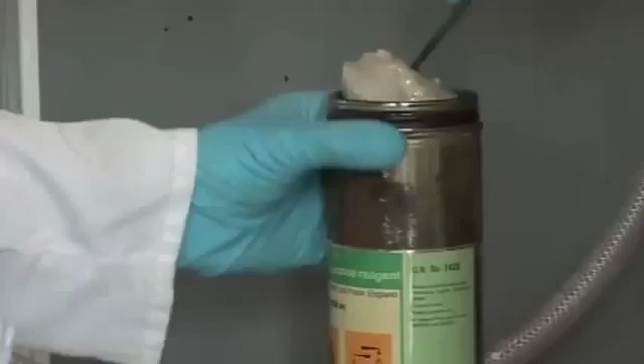It's stored under an oil to stop air or moisture getting on it. Reacts very, very quickly with air and also with water. Well, the hydroxide is a white crust on the outside. It's fizzing around as it's generating lots and lots of hydrogen gas. And see now the heat from the reaction is burning away all of that hydrogen.

You don't want to build a reactor out of stuff that wants to burn, react, anything. You want to go, whatever I've made you out of, I want it to be like the rock bottom of stability. I don't want there to be a step further down that is chemically favorable, because that's how things burn.

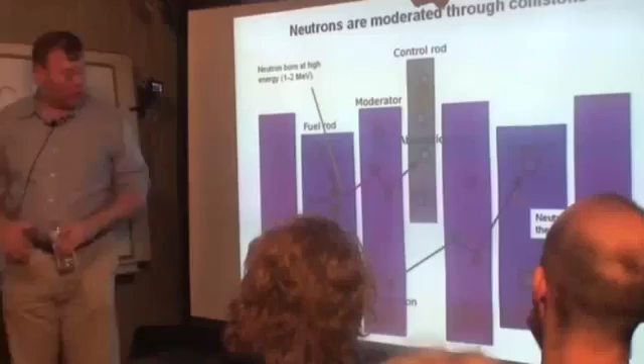The fast breeder guys use sodium because it doesn't slow down the neutrons. And everybody who was pushing plutonium said, we want a fast reactor. That's the only way to do it. The notion of the public being intimately involved in very complicated technical issues which went way beyond the competence of any member of the public, it just didn't seem that that was the right way to do it.

And I think the basic question is, can modern intrusive technology and liberal democracy coexist? The decision of what is acceptable is not something that we technologists can make. It's something that the public makes. I think a lot of people were daunted by nuclear energy. Oh, there's no way we could learn this stuff. I don't want to do that class. It's going to be too hard.

These three coolants are generally associated with three different nuclear fuels. Liquid sodium-cooled reactors are fueled by plutonium. Water-cooled reactors are fueled by enriched uranium. And molten salt reactors can be fueled by thorium. The reactors deployed commercially around the world are water-cooled. Today, we use water to cool reactors because we use enriched uranium as fuel. And we use enriched uranium as fuel in today's reactors because they are water-cooled.

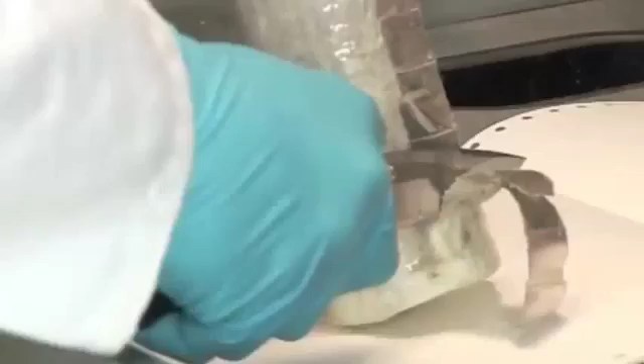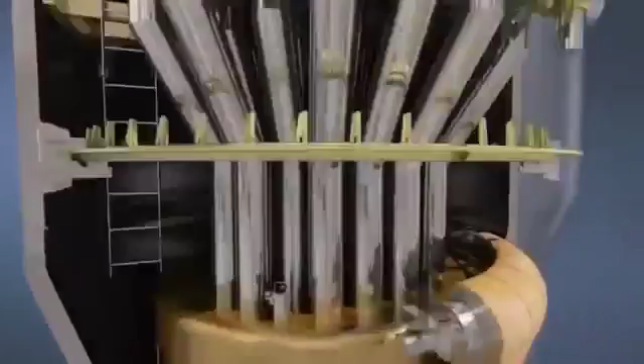Despite sodium's reactivity with both air and water, it is in some respects a safer coolant than water. This is because our enriched uranium-fueled water-cooled reactors pressurize the water to raise its boiling point and drive steam turbines more efficiently. If we didn't pressurize the water, then we'd be using much more uranium and producing much more nuclear waste per watt of energy.

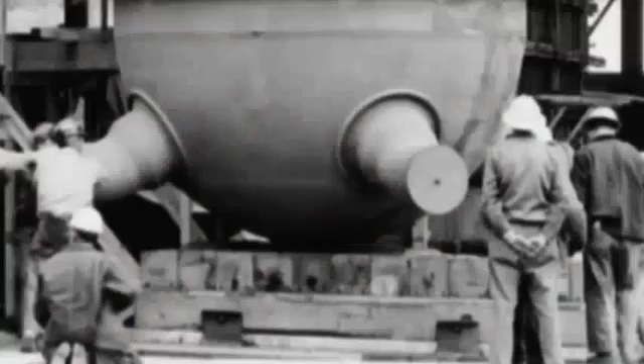In addition to being a thorium guru, Weinberg was also the original inventor of the pressurized water reactor. So it was a little bit of a tricky thing to have the inventor of the light water reactor advocating for something very, very, very different. As long as the reactor was as small as the submarine intermediate reactor, which was only 60 megawatts, then containment shell was absolute. It was safe. But when you went to 1,000 megawatt reactors, you could not guarantee this.

Weinberg never really was crazy about the light water reactor. He didn't like the fact that it had to run at really high pressure. He figured there would be an accident someday where you were not able to maintain the pressure or keep cooling it. In some very remote situation, conceive of the containment being breached by this molten mass.

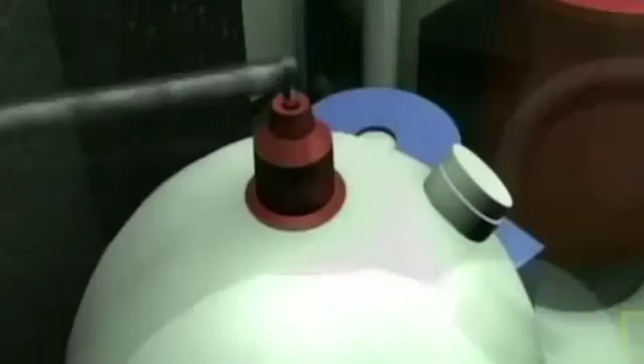A small valve in this collection of pipes is stuck in an open position, letting steam and water escape from the reactor core. It's critical that the uranium fuel rods that make up the reactor core stay underwater. A yellow tag covers an important light. They're convinced that the core is covered by water. A huge bubble of hydrogen is forming right inside the reactor vessel.

The hydrogen was generated by reaction between steam and the zirconium fuel cladding. And then that hydrogen ignited from some sparks. Boom! The whole building shudders. I mean, the whole building, the plant building, boom! And somebody says, what was that? An explosion had taken place inside the containment building. And those gaseous fission products came out and were released to the environment.

Pregnant women and preschool-aged children leave the area within a 5-mile radius. It took a month to shut the reactor down. But finally, Unit 2 was stone cold dead. The biggest environmental release at Three Mile Island was krypton and xenon, but they don't have an uptake in the body. It scared a bunch of people, but it didn't hurt anybody.

It really comes down to which fission product is it. I know that sounds particular. Number one, most dangerous is iodine, because of the way it's taken up by the thyroid.

There was a metallic taste in our mouth, an acidity. They say radiation has no taste. It was only later we realized it was the taste of radioactive iodine.

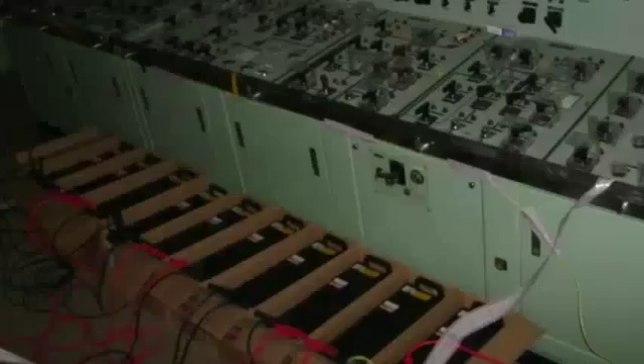The coastline was devastated. Most of the backup diesel generators needed to power the cooling systems were located in basements destroyed by the tsunami waters. The workers had no functioning instruments to reveal what was happening inside the reactor cores. All of us who had a car were asked to get the batteries. The scavenged batteries allowed vital monitoring instruments to work again.

The levels caused panic. Pressure was going up and up. Everyone thought, isn't this dangerous? The rising heat of the fuel rods in the reactor core was creating massive amounts of radioactive steam and hydrogen.

We begin by making these uranium oxide pellets, and we form them into fuel rods clad in this zirconium. Turns out the zirconium, in certain conditions, can be quite reactive with the water that's surrounding the reactor. We have a fuel and a coolant that are inherently incompatible with one another, and that's how we run nuclear today.

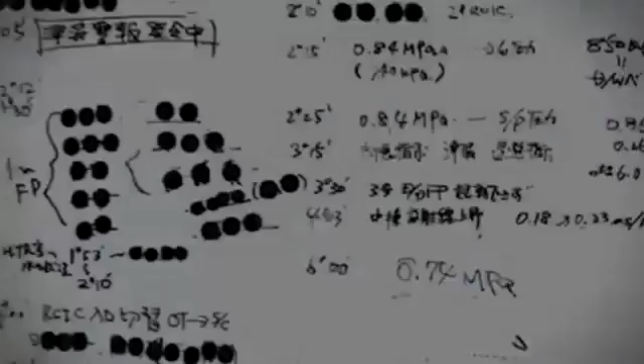As night fell, the Japanese government ordered an evacuation of everyone within 2 miles of Fukushima Daiichi. Radiation levels were now rising. And this isn't inside the reactor itself, it's in the office. The engineers suspected something TEPCO would not acknowledge for months. Nuclear meltdown had begun. The Prime Minister began to suspect that TEPCO was hiding the truth. He decided to go to Fukushima Daiichi himself.

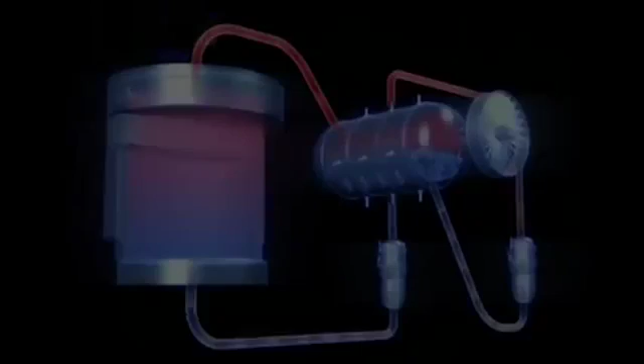Three Mile Island, Chernobyl, and Fukushima were all radically different incidents. What was similar at all three was how poorly water performed as a coolant when things started to go wrong. This is not to say that water coolant caused these accidents to occur. It did not. All three accidents were initiated by different combinations of design and operator error. It was water coolant which allowed these errors to multiply and ultimately result in the escape of radioactive isotopes into the environment.

At Three Mile Island, water couldn't be pumped into the core because some of the coolant water had vaporized into steam. The increased pressure forced coolant water back out, contributing to a partial meltdown. At Chernobyl, the insertion of poorly designed control rods caused core temperature to skyrocket. The boiling point of the pressurized water coolant was passed and it flashed to steam.

It was a steam explosion which tore the 2,000-ton lid off the reactor casing and shot it up through the roof of the building. At Fukushima, loss of power to the pumps allowed coolant water to get hotter and hotter until it boiled away. These three accidents illustrate the need for a coolant with a higher boiling point than water.

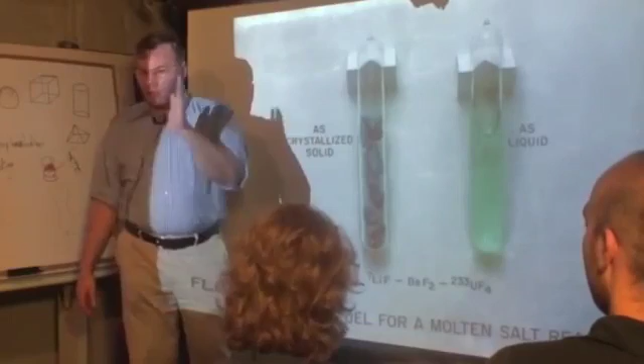It's only got 100 degrees of liquid range, okay? 0 to 100 C. That's not really particularly impressive. So to jack up water's liquid range, you have to put it under pressure, because that's the only way to get water to go up to 300 degrees C without turning into steam. Super high pressure is one of the basic challenges, difficulties, flaws, whatever you want to call it, of the water-cooled reactor approach. The salts, on the other hand, you have to heat them up to about 300 C before they melt. But once they melt, they have 1,000 degrees C of liquid range.

Safety is one of the most important reasons to consider very seriously molten salt reactors. And this is because of the clever implementation that was demonstrated in the molten salt reactor experiment of the freeze plug and the drain tank. And what this simply was, it was just a small port in the bottom of the reactor that was kept plugged by a frozen plug of salt. And to keep the port plugged, they had a blower that would blow cool gas over it. So there was a little plug of frozen salt there.

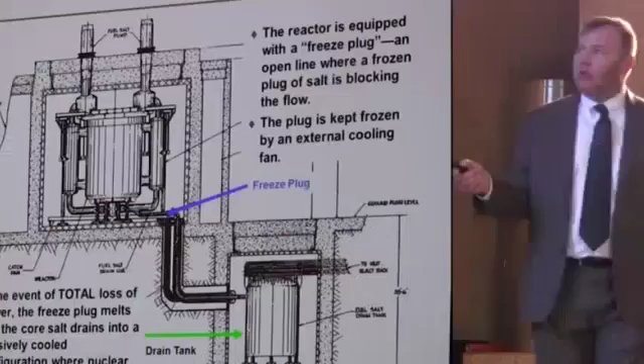Well, if the power went out, the blower turned off, and the heat would melt the frozen plug, and guess what? The fuel drained into this drain tank, and the difference between the drain tank and the reactor vessel was, the reactor vessel was not meant to lose any thermal energy. The only place you wanted to lose thermal energy was to give it up in the primary heat exchanger. The drain tank, on the other hand, is designed to maximize the rejection of thermal energy to the environment.

And I'm a mechanical engineer, so all we ever talked about in school was how to add heat to things and take heat out of things. And one of the hard things about designing a nuclear reactor is design it to not lose any heat while you're running it, because you don't want to lose a bunch of heat in normal operation, but then to turn around and try to keep it cool if something goes wrong. So there are two conflicting things. The great thing about liquid fluoride reactors is you can design them completely separately. You can say, here's my reactor and it's designed to make heat, and here's my drain tank and it's designed to cool in all situations.

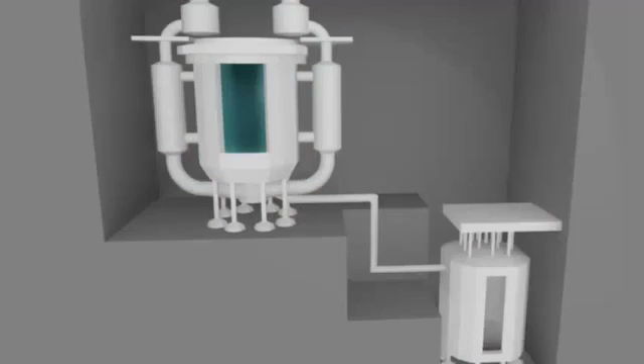Better than having what's called deterministic safety systems or engineered safety systems is to have inherent safety systems that will work 100% of the time because it is based on the laws of physics. A cooling system that is completely passive, that does not rely at all on electrical power to manage the decay heat after shutdown. And it's always going to work because gravity is always going to be turned on.

Because it was not operating at high pressure, this is a system that was tolerant of extraordinary damage. I mean, if you wanted to go in and jam a projectile through the side of the reactor, the salt would still just drain out into a pan, but the pan would run back into the drain tank. Now in that situation, you're not going to turn the thing right back on again, but it's not going to lead to a dangerous release of radioactivity.

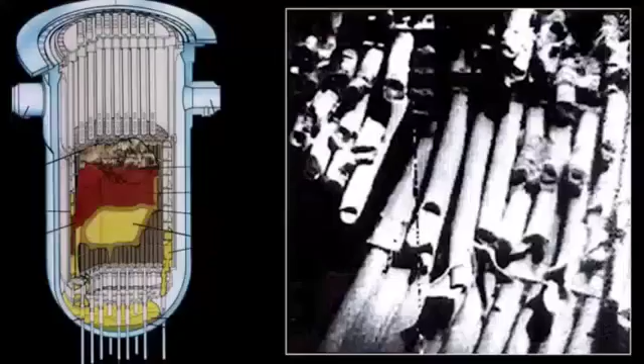At Three Mile Island, coolant water which had boiled into steam reacted with the fuel rod cladding to produce hydrogen gas. This led to several explosions. At Fukushima, steam also reacted with the fuel rod cladding to produce hydrogen gas. This led to hydrogen gas explosions at reactors 1, 3, and 4.

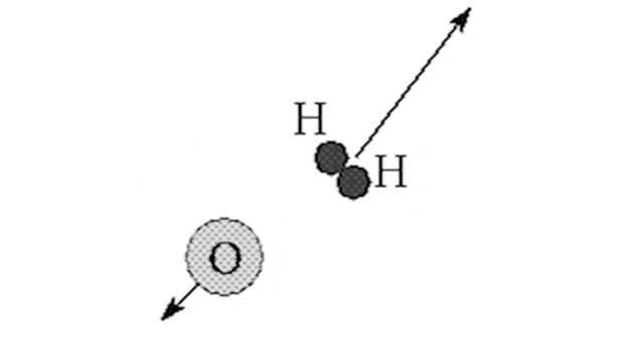Let me diss on water a few more times. It's a covalently bonded substance. The oxygen has a covalent bond with two hydrogens. Well, neither one of those bonds is strong enough to survive getting smacked around by a gamma or a neutron. And sure enough, they knock the hydrogens clean off. Now, in a water-cooled reactor, you have a system called a recombiner that will take the hydrogen gas and the oxygen gas that is always being created from the nuclear reaction and put them back together.

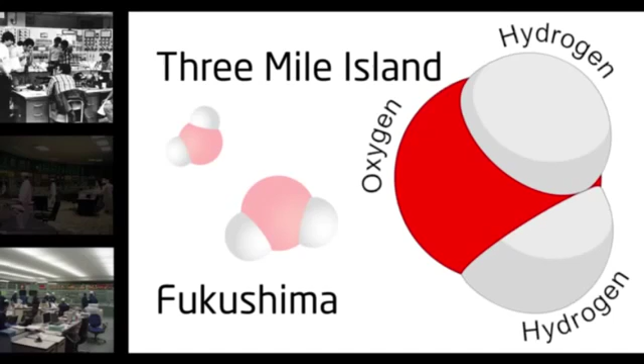It's a great system as long as it's operating and the system is pumping. Well, at Fukushima Daiichi, the problem was the pumping power stopped. H2O can also react with the fuel cladding to release hydrogen and damage the cladding, releasing radioactive isotopes. These two accidents illustrate the need for a coolant which is more chemically stable than H2O. A nuclear reactor is a rough place for normal matter.

The nice thing about a salt is it's formed from a positive ion and a negative ion. Like sodium's positively charged and chlorine's negatively charged. And they go, we're not really going to bond. We're just going to kind of associate one with another, you know. And that's what's called an ionic bond.

Yeah, you're kind of friends, you know. You're Facebook friends. Facebook friends.

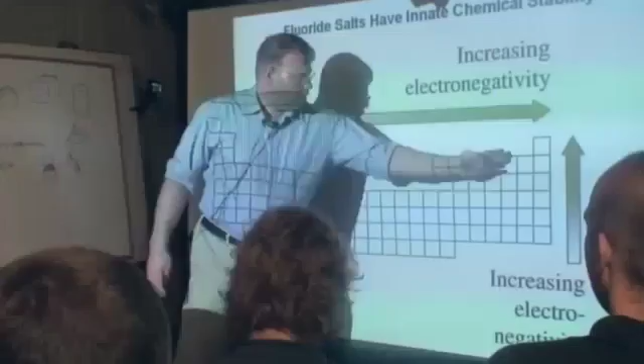All right, well, it turns out this is a really good thing for a reactor because a reactor is going to take those guys and just smack them all over the place with gammas and neutrons and everything. And the good news is they don't really care who they particularly are next to. As long as there's an equal number of positive ions and negative ions, the big picture is happy. A salt is composed of the stuff that's in this column, the halogens, and the stuff that's in these columns, the alkalis and the alkaline earths.

Fluorine is so reactive with everything, but once it's made a salt, a fluoride, then it's incredibly chemically stable and non-reactive. Sometimes people go, oh, you're working on liquid fluorine reactors. No, I am not working on liquid fluorine reactors. We're working on fluoride reactors, and there's a big difference between those two. One is going to explode, the other one is like super duper stable.

I see moving to molten salt fueled reactor technology as a way to get rid of all the stored energy term problems that we look at in today's reactors, whether it's pressure, whether it's chemical reactivity, even the potential of the fission products in the fuel itself to be released. In fluoride fuel, which is what we would use in a molten salt reactor, those fission products are bound up very tightly in salts. Strontium and cesium are both bound up in very, very stable fluoride salts. Cesium fluoride, very stable salt. Strontium difluoride, another very stable salt.

In light water reactors, cesium is volatile in the chemical state of the oxide fuel of a light water reactor. And that's been one of the concerns about cesium release. Cesium would not release from a fluoride reactor at all. So why are we using water to cool today's reactors? If water coolant prohibits us from completely consuming uranium or thorium as fuel, why did we start using it in the first place? The association between different nuclear fuels and their respective coolants is because some nuclear fuel requires slow neutrons and some nuclear fuel requires fast.

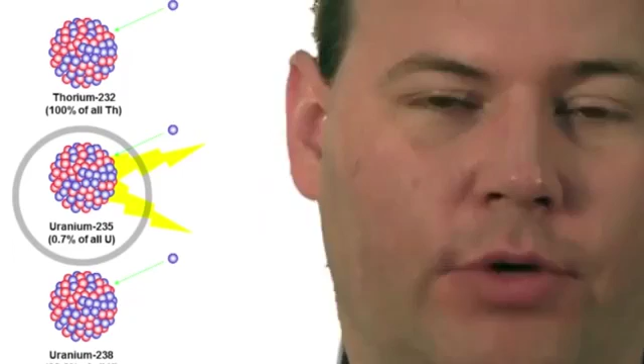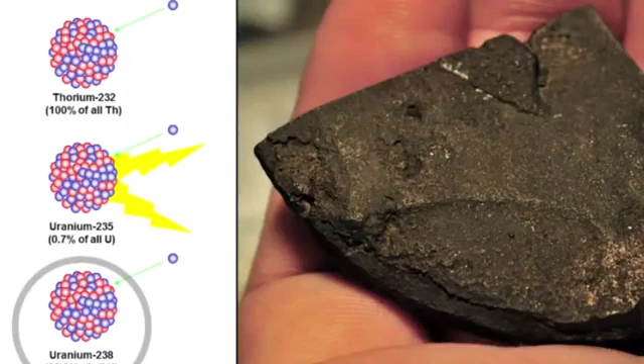There really were three options for nuclear energy at the dawn of the nuclear era. Only one of the materials in nature is naturally fissile, and that's uranium-235, which is a very small amount of natural uranium, about 0.7%. This was the form of uranium that could be utilized directly in a nuclear reactor. Most of the uranium was uranium-238. This had to be transformed into another nuclear fuel called plutonium before it could be used. And then there was thorium. And in a similar manner to uranium-238, it also had to be transformed into another nuclear fuel, uranium-233, before it could be used in a reactor.

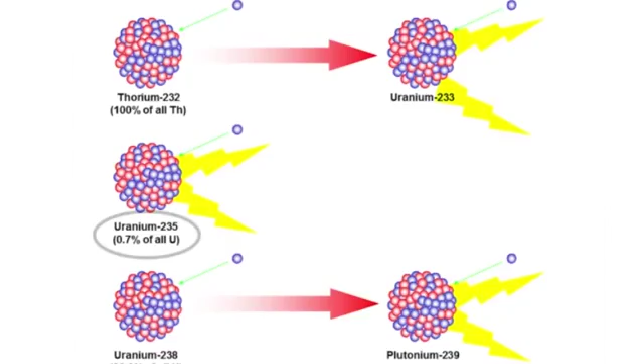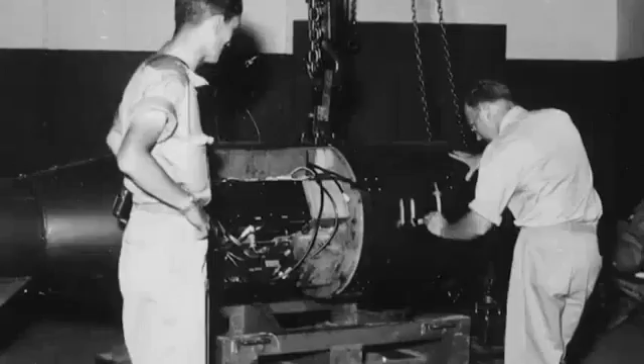Well, this was wartime. Their plan was to make bombs. They took natural uranium and they separated those two isotopes. They would highly enrich uranium-235 from less than 1% up to like 90+%. Took big factories. It's very difficult to do isotopic enrichment. But this is how they made the uranium for the first nuclear weapon used in war. This was the bomb at Hiroshima. It was called Little Boy.

Then they said, well, what can we do with all this junk uranium-238, the 99.3% of it? You could expose it to neutrons, and you could make it into plutonium. Now, plutonium is a different chemical element than uranium, so they can be chemically separated. Uranium-235 and uranium-238 are like identical chemically. There's no chemical difference between them. But there is a chemical difference between plutonium and uranium, so it was a lot easier to do a chemical separation of the plutonium you'd made, and that's how they made the Nagasaki bomb, which was called Fat Man.

Okay, well maybe we can do the same thing with thorium. Maybe we can expose it to neutrons and we can make it into uranium-233. Uranium will be chemically separable from thorium and we can go make a bomb out of it, right?

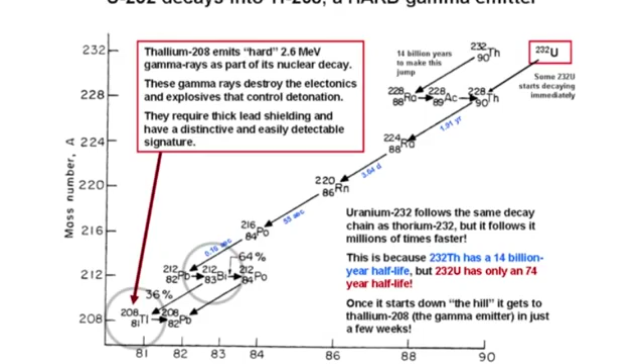Sounds great. It's a really bad idea because as you made the uranium-233, you were always making uranium-232. You didn't make a lot of it, you only made a little bit of it. But uranium-232 is much more radioactive than uranium-233. And in addition to that, here's the decay chain that uranium-232 is on. It jumps down to bismuth-212 and thallium-208. And these two decay products put out very, very strong gamma rays.

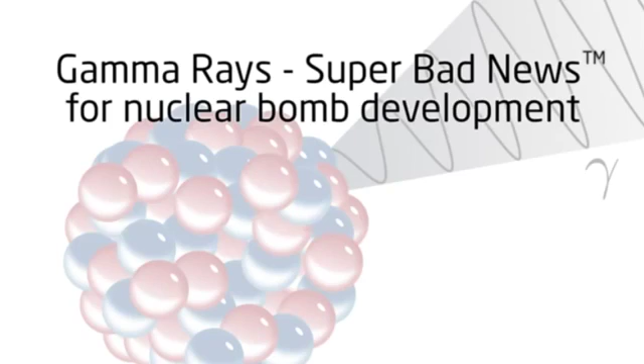And these gamma rays are just super bad news if you want to go and build a practical nuclear device, because they tell everybody where the stuff is and they kill you. So really quickly they were going, okay, we can work with uranium-235, that seems okay. We can work with plutonium, that seems okay. But this uranium-233 stuff, that's bad news for making a nuclear weapon. So thorium was just set aside.

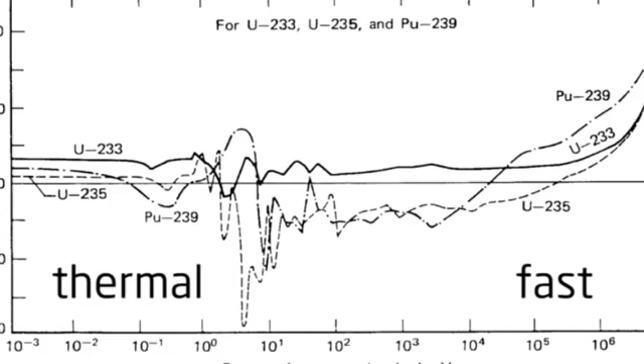How much energy did the neutron have that you smacked the nuclear fuel with? Okay, how much energy did it have? And then how many neutrons did you kick out when you smacked it through fission? 2 is a very significant number in breeder reactors. You need 2 neutrons. You've got to have 1 to keep your process going, and you have to have another 1 to convert fertile material into fissile material.

Okay, look at plutonium. It's that dip below 2 right there. That's what makes it so you cannot burn up uranium-238 in a thermal spectrum reactor, like a water-cooled reactor. You just can't do it. The physics are against you. And the reality is you do lose some neutrons. You can't build a perfect reactor that doesn't lose any neutrons. So they looked at this and they said, man, we just can't burn uranium-238 in a thermal reactor. It just can't be done.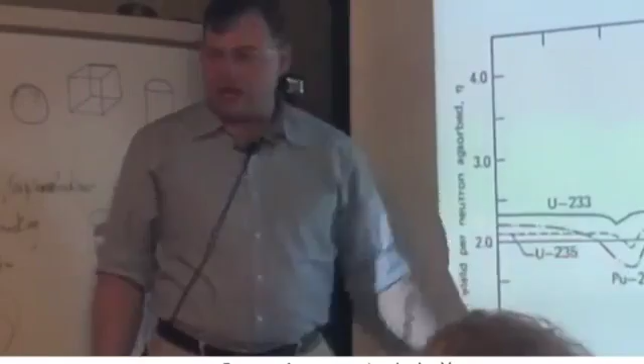Well, you know, these guys are undeterred. They said, well, here's what we'll do. We'll just build a fast reactor, because look how good it gets in the fast region. Wow, it gets above 2. In fact, it's up to 3. Wow, this is really good. Well, there's a powerful disincentive to doing it this way, and it has to do with what are called cross-sections. These are a way of describing how likely it is that a nuclear reaction will proceed.

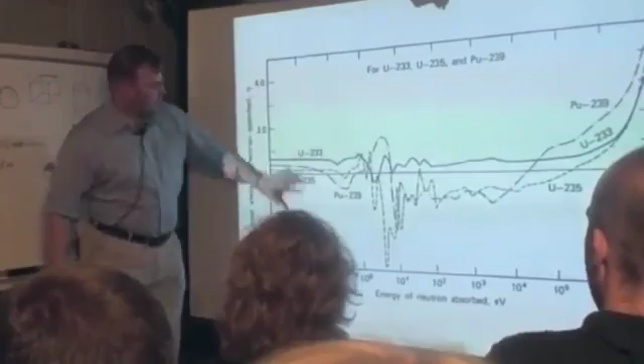Look how much bigger the cross-sections are in thermal than they are in fast. How many of these little dots are we going to need to add up to this size? We're going to need a lot. So this is why it was a big deal to be able to have performance in this region of the curve. Those little bitty dots, they're up here in this part of the curve. Okay, this is the fast region. This is the thermal region.

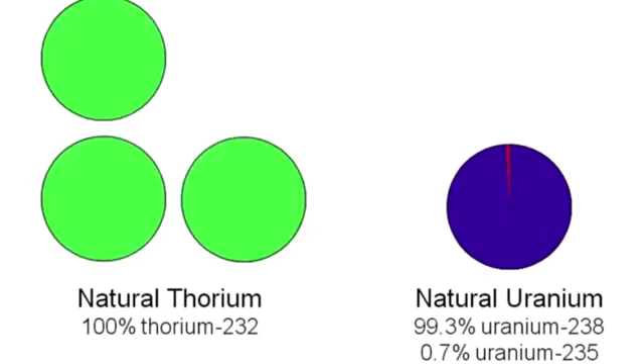Thorium is more abundant than uranium. All we're consuming now is that very, very small sliver of natural uranium. But this is not the big deal. No, it's not a big deal that natural thorium is hundreds of times more abundant than the very small sliver of fissile uranium. The big deal about thorium is that we can consume it in a thermal spectrum. That's the big deal of thorium, is that it can be consumed in a thermal spectrum reactor.

When you're talking about a thermal spectrum reactor of any kind, you have to have fuel and you have to have moderator. And they're both essential to the operation of the reactor. The moderator is slowing down the neutrons. And when the neutrons have been slowed down, we call them thermal neutrons, or a thermal spectrum. In a water-cooled reactor, we use water, specifically the hydrogen in the water, to slow down the neutrons through collisions.

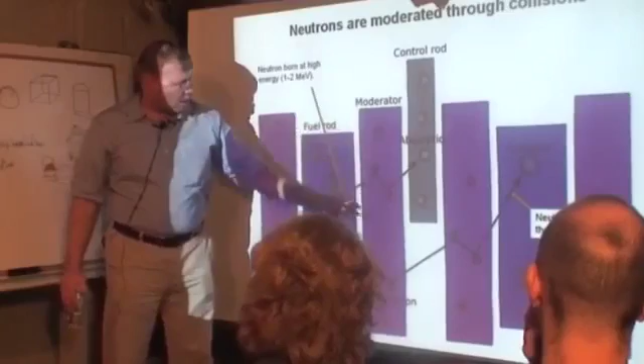The graphite in the molten salt reactor, is that a moderator? Yes, that's the moderator in the reactor. Same idea, except we use graphite as the moderator instead of water. Neutrons go in the graphite, hit the carbon atoms, they lose energy, they slow down. Now why slow it down? That's the difference between you going from that little bitty dot to the big dot. That's why you want to slow it down. You want the big dot, not the little bitty dot.

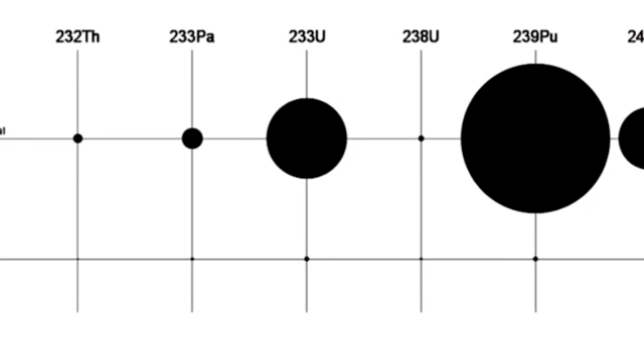A thermal spectrum molten salt reactor has to have the graphite moderator of the core in order to sustain criticality. If the vessel ruptures, recriticality is fundamentally impossible. The drain tank does not have any graphite in it.

If something happens where that fuel drains away from that graphite, criticality is no longer possible. The reactor's subcritical, fission stops, and there's no way to restart it without reloading the fuel back into the core. This is such a remarkable feature, and it really is unique to having this liquid fuel form and to having something that can operate at standard pressure. You can't do this in solid fuel. If you do this in solid fuel, it's called a meltdown.

That's bad. Now, in a fast reactor, on the other hand, you don't depend on moderator. You put enough fuel in the reactor so the criticality is possible even without moderator. In those scenarios, if there's a drain or a spill or something, you need to be careful about what geometries it could get into, because recriticality is not, from first principles, impossible. It may be impossible in the design you've designed, but that becomes design specific. Whereas in a thermal reactor, it is just impossible. Outside of the lattice of moderator, you can't have a criticality set up.

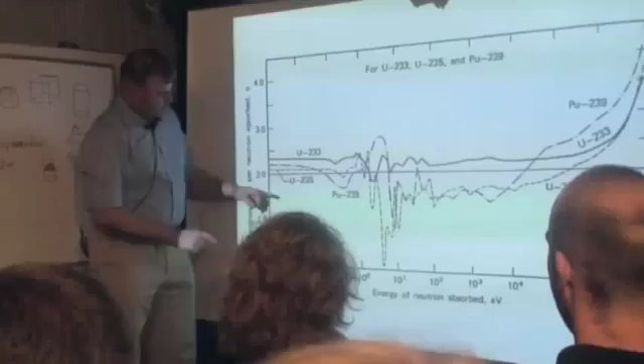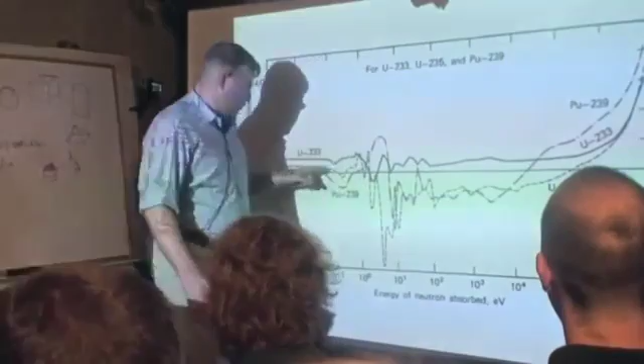The thermal region, look who's doing the best. Look at uranium-233. Look at that. Okay, look at plutonium. It's that dip below 2 right there. You just can't do it. The physics are against you. But uranium-233, on the other hand, okay, yeah, it gets a little better in the fast, but dang, it's still pretty dang good right here in the thermal. Big targets, a lot easier.

This fact was not well known probably till about the 70s. There was some data that indicated it, but there was enough uncertainty even as late as 1969 that the Atomic Energy Commission did not feel like it was a safe bet to go with thorium. Everybody who was pushing thorium said, we like thermal, this is the kind of reactor we want to build. And everybody who was pushing plutonium said, no, we want a fast reactor. That's the only way to do it. And so what happened is they put resources into the plutonium breeder reactor almost from the get-go.

They built the Experimental Breeder Reactor 1 in 1951. So this was the first reactor that made electricity. Four little light bulbs here. This is a mock-up of the core. This size was giving off a megawatt of thermal energy. How tall is this? How many meters? 8 inches. This is actual size? That's scaled down? No, that's full size.

EBR-1. This was a breeder reactor. It was designed to convert plutonium into energy while making new plutonium. This was not a light water reactor. This predated the light water reactor by years. It was a fast breeder. This is 1951. This is a Gen 4 reactor.

No kidding. Early nuclear pioneers like Enrico Fermi and Eugene Wigner saw the future quite a bit differently. Fermi believed that because of the performance of plutonium, and especially because it could have a substantial breeding gain, in other words, it could make more fissile material than it was consuming, that we should really focus our efforts on the fast breeder reactor. Eugene Wigner, on the other hand, looked at these same pieces of information and reached a different conclusion, which was that thorium was a superior fuel and that it should be realized in a thermal spectrum, in a thermal breeder reactor.

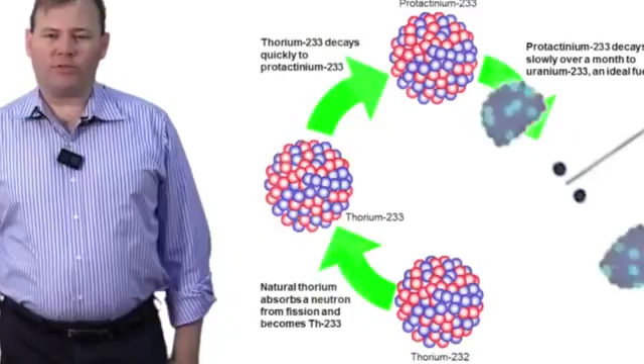And this opened up a number of possibilities with coolants and reactor configurations. But thorium, in another way, was a rather unforgiving fuel. It did not have a great breeding gain like plutonium had the potential for in the fast spectrum. You had to make sure that you were very careful and conserving of your neutrons. You couldn't waste a lot on losing neutrons to structural materials or losing them to leaks out of the reactor or losing them to absorptions in the daughter products of fission.

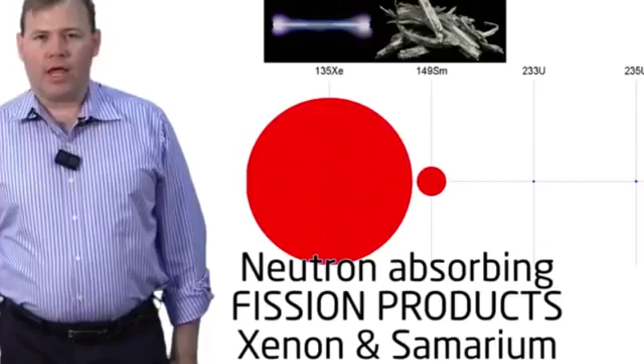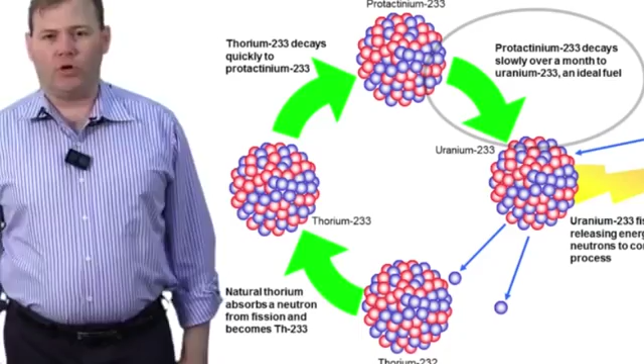And thorium also had another challenge. It took about 40 days once it absorbed a neutron to turn into uranium-233. There was a time delay there between when it absorbed a neutron and when it became new fuel. Fermi wondered how it would be that thorium would overcome this problem of the delay from when it absorbed a neutron to when it became new fuel. And Wigner had already seen a possible path forward, which was to do something rather revolutionary. Build a nuclear reactor out of liquid fuels rather than out of solid fuels.

I believe part of this came from Wigner's educational background. He was the only person, or almost the only person, who combined great skill as a nuclear physicist with great skill as an engineer. Wigner, of course, was a chemical engineer by training. He was the only one who commanded both of those attributes. And so he was able to see both the engineering and physics aspects.

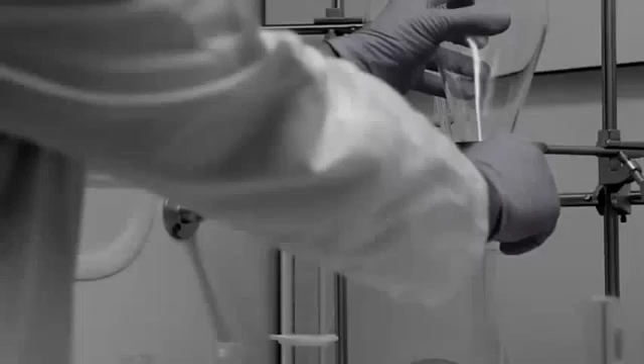He was a chemical engineer by training, and he knew that in chemical processes, the reactant streams are almost always liquids and gases. They're fluids. And in fluids, a complete mixing is possible, and completion of the various chemical reactions are possible. He looked at the nuclear problem and wondered if the same principle might not apply. With a fluid-fueled reactor, it would be possible to isolate protactinium-233 as it was formed and to allow it to decay and prevent it from being destroyed before it could complete its transition to uranium-233.

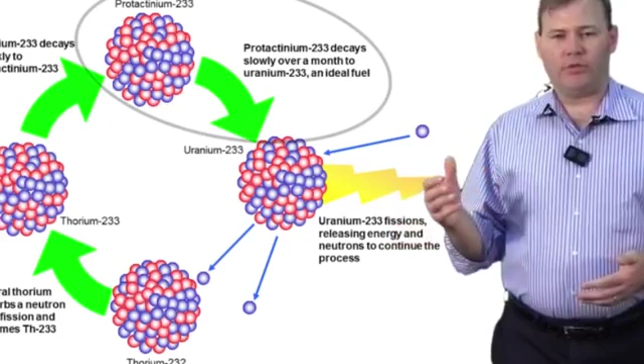Wigner was not successful in convincing the bulk of the nuclear community to take the thorium approach. They, by and large, said, we're going to go the plutonium route. And one of the reasons why was they had developed a great deal of understanding about plutonium from the weapons program. They had made the stuff, they had worked with its chemistry, they'd made fuel out of it. They go, we get this.

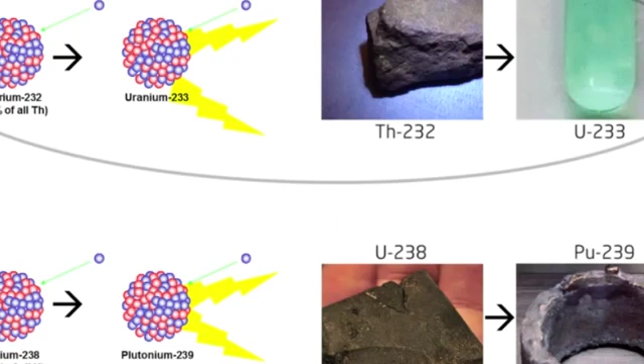Thorium, we haven't really messed with thorium. You know, it would be like starting over. So that propensity there was to go and do what you already knew how to do. And the plutonium was so much better developed than the thorium. So Wigner was not terribly successful in making converts in the nuclear community. But he did make one convert, this guy, Alvin Weinberg. He was his student during the Manhattan Project.

Of course, I had heard about Eugene Wigner as this great, wonderful physicist. I gradually became his assistant in charge of the nuclear design. And Weinberg got it. He got the big picture. He got, we need thorium, we need thermal reactor, we need liquid fuel. I see it. I see what we got to do.

We visited with Mr. Rosenthal after we met with you. He spent time in Washington, D.C. with Milt Shaw. And that Milt actually had quite an affinity for Knoxville and Oak Ridge. But he wanted Alvin Weinberg and Oak Ridge to get on the fast breeder funding wagon, and that Weinberg wanted to stay on with thorium and molten salt.

Well, it was pretty obvious that Shaw was completely convinced the LMFBR, with its sodium cooled system, was going to be successful. If we have a winner here, why spend money on what we know is going to be the loser? So everyone was just so euphoric about the idea of the fast breeder. Well, that's the way it appeared to me.

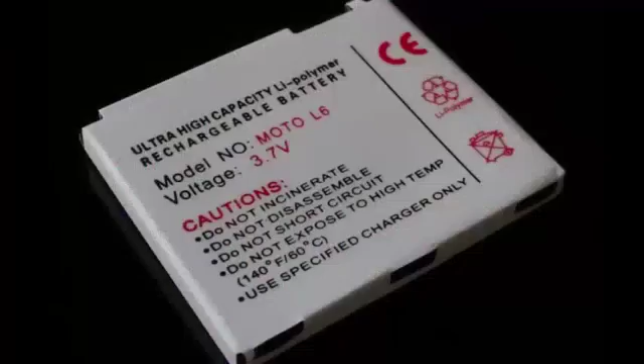Well, no, see, they're not dumb. You got it, brother. You got it. Well, what's their answer? What's their answer? Fire suppression system. If you've got a hot liquid combustible metal in your iPhone, lithium. Yes. Why are you allowed to walk around with it? Because lithium is in a stable compound. It's not pure lithium. Yeah, I'll show you some YouTube videos of lithium not being in a stable compound.

Yeah. If I take a lithium battery and I expose it to air, it's not immediately going to catch on fire. Sort of uneventful. Oh well. A lithium battery catches on fire because it shorts out. It shorts out. But the point is, there's a known history of lithium accidents, which are pretty bad, you know, and we don't ban them, but, you know, I agree.

I don't think the IFR was the best possible solution in the world, but they did have a history of proving that it could shut itself down. Right, with total plant blackout. They simulated a complete blackout, so the power was lost to all cooling systems. For fast sodium reactors, you've always got two separate loops. Okay. The primary gets radioactive.

Oh, because it's clean sodium and your dirty sodium. Yeah. Okay, gotcha. It's the clean sodium that goes to the steam generator. So if you get a failure in the steam generator wall, you haven't got radioactive sodium. I got that. So this loss of heat sink test would be turning off the power to the secondary, so you're not drawing the heat out of the core.

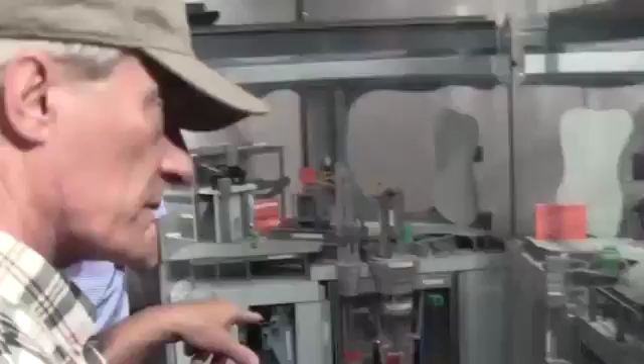Is that what the heat is changing? You would shut down the tertiary, the water system. The tertiary, okay. And this other one, loss of flow test, is that shutting down the intermediate? The loss of flow test is shutting off the pump, just turning off the primary pump for the primary sodium. So these two tests are turning off the primary and turning off the tertiary.

Yeah. Okay. But at all times, the core was still bathed in sodium. The sodium's there the whole time. The only thing is you're also doing it without scram, without control rods going in. This gets so warm, the fuel assemblies expand, the pins lengthen, they expand sideways, pressurizing up against the core rigidity structure.

Achieving a strongly negative temperature coefficient in a thermal reactor is a much more straightforward proposition than in a fast reactor. It can be done, but it's easier in a thermal spectrum reactor. There's a lot of options, many connected with the process of moderating neutrons. You change something about that process and it helps you achieve a strongly negative temperature coefficient. The fuel expands, the clad expands, the fuel assemblies expand, the core support structure expands, the core plate underneath expands.

Gotcha. This is at the molecular level in the salt reactor because the salt expands. You get the same thing, except this is done at the physical level, and so in the salt it's easier to have this happen. That's why I wanted to drill down and get some questions answered. Great, that was very informative.

Thank you, sir. The trouble is these tests were done about two weeks before Chernobyl. Yes, that was so amazing. No one even knew about this, which was a shame. Bob, so this was not commercialized, right? We were going to; it was called Clinch River. I was working on Clinch River, and then Al Gore, who thought plutonium is nasty, wicked, and evil, persuaded Clinton to shut the program down. I've actually been to the site where the Clinch River fast breeder was supposed to be built. I hopped the fence and walked out to the river, and it's an empty field.

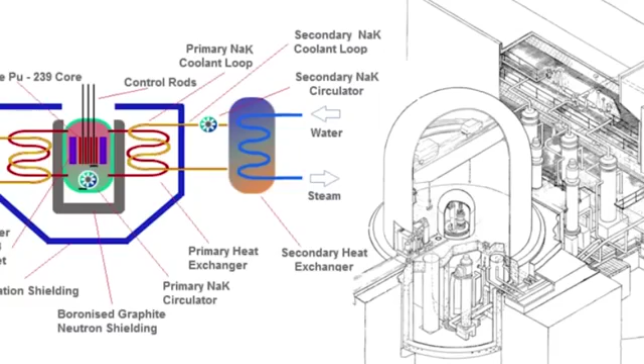The AEC said, what happens if you get a meltdown? So they said, we'll put some zirconium plates underneath. The trouble is, they only tack welded them, and the vibration tore one off, and it went up, flattened underneath, and blocked off the sodium. So there's a significant meltdown, but they cleaned it all up. Milt Shaw, insisting on oxide fuel for Clinch River, wouldn't give them money to buy another core load. For want of a couple million dollars, the plant went down.

Unbelievable. Good old Shaw, he's the guy who really is responsible for our trouble. Milt Shaw is quite infamous in the molten salt community. I had no idea until I read Plentiful Energy. Milt Shaw is infamous to the IFR crowd as well. He was just infamous to everybody. The folks who were in support of the Clinch River fast breeder reactor had very sharp elbows.

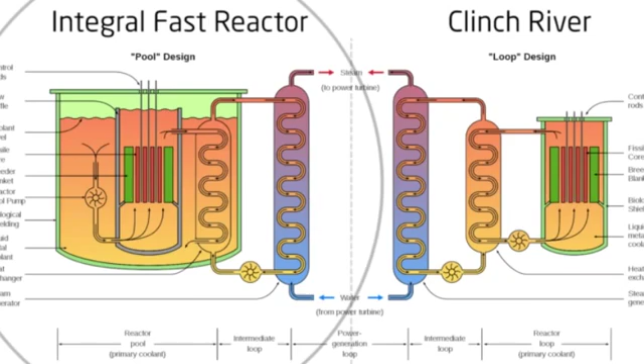Guys who were working on the integral fast reactor have just as much heartache with the focus on the oxide-fueled loop reactor at Clinch River as you do. I mean, I agree. Fast reactor does not equal fast reactor, right? Sodium loops with pumps. That flavor, that was the project. And people who wanted to do metal fuel in a pool reactor, they wanted to do molten salts, they wanted to improve the light water reactor, they wanted to prove that the light water reactor could do breeding as well. All of those projects were put on back burners or defunded completely.

Making solid nuclear fuel is a complicated process, and we extract less than 1% of the energy from the nuclear fuel before it can no longer remain in the reactor. Kirk makes a big deal about the fact that he wants to use thorium because it's 200 times better than using uranium, but using uranium is about 10,000 times better than using oil. So let's make the big jump first. The nukes, though, need to stop fighting amongst each other and compare their power plants to the real competition that holds 85% of the market, which is the fossil fuel companies.

Nobody saw the light water reactor as the machine on which we would power our civilization using nuclear power for thousands of years. The only question is which breeder and how fast do we get to it? I mean, I got a 1962 report to the president, and right in there it states, this is a stopgap technology. I think these early nuclear pioneers would be absolutely floored to show up today in our nuclear world and go, oh my gosh, you're still using light water reactors? I mean, come on, guys. We should have seen more technology advancement by now. We should have seen something better.

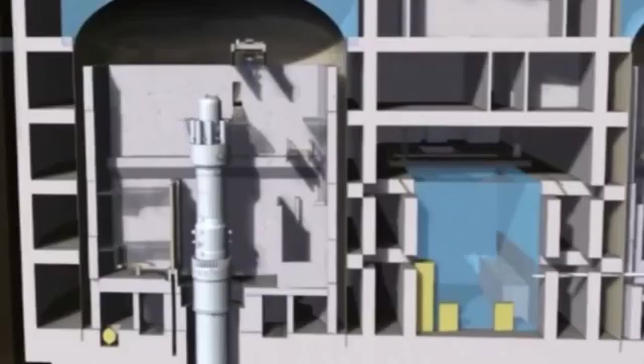Pressurized water reactor has to take 2,000 psi, which is a really thick pipe. It's typically 4 to 8 inches depending on the diameter of the pipe. We're doing new things with light water. The core, the pumps, the control rod drive mechanisms, the steam generators, the pressurizer, all in one steel pressure vessel. No piping penetrations in excess of about 3 inches in diameter. I'm working on that exact reactor.

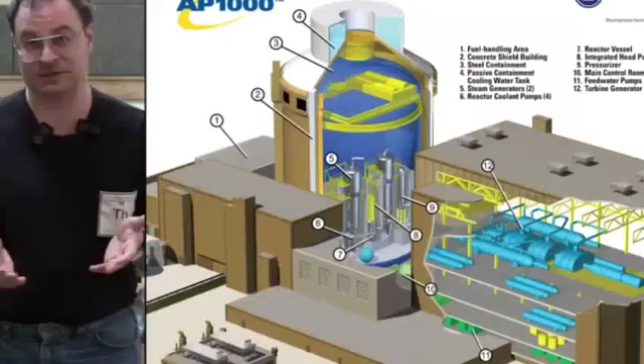The light water reactor is still the most efficient, safest energy source we have on the planet right now. And it's a real thing, and we have a big worldwide fleet of these things. It should have been bigger, but we have like 400 some reactors running. All we are saying is that in the very near future, we could have something that's even yet safer and even yet more efficient. If someone said, well, all you can have are water-cooled reactors of some type or a vast array of fossil fuel and so-called renewable energy, I'd rather all my energy was created by light water reactors any day. Nuclear right now means water-cooled reactor, uranium oxide solid fuel, poor fuel efficiency, and steam turbine. That's what nuclear power means right now.

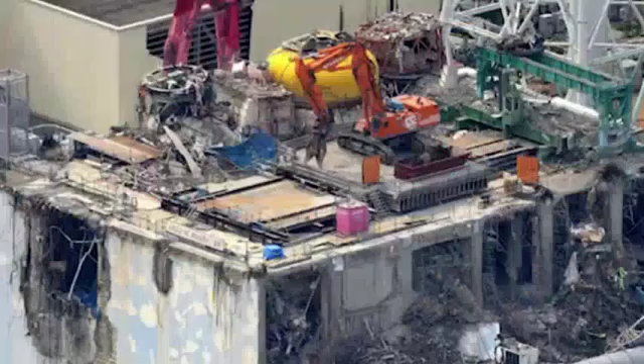How do you tell people this isn't your father's nuclear, or this is different? It's a much better way to utilize our resources in every way. Molten salt reactors reignited my passion in nuclear because to me it solves the waste problem. People look at Fukushima Daiichi and they go, is this the end of nuclear power? And I go, no, it's not the end of nuclear power. There's a zillion other ways to do nuclear power. I think this is the best way. Maybe I'm wrong, though. Maybe there's a better way. I've been looking for it.

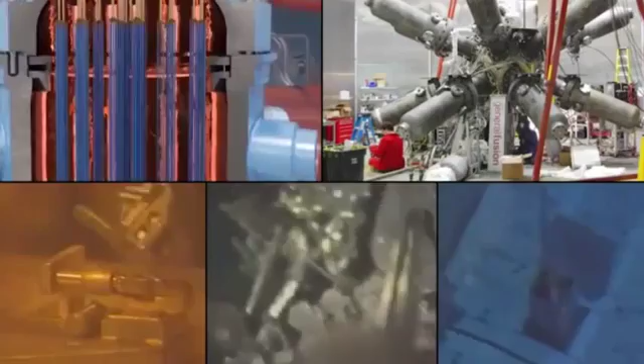I tell anybody I got a standing invitation. You can figure out how to do this better, I will be happy to go do whatever it is that's better. I'm always looking for it. Show me a system that is superior to a molten salt reactor, and I'll say, yeah. But to this day, there isn't one. It's not based on nothing; people have spent their careers and many successful long-term tests. This is not a theoretical technology. This is a proven technology that just needs to be commercialized. It's just by dint of a solid fuel supply chain having gotten started that we don't have a molten salt supply chain in place.

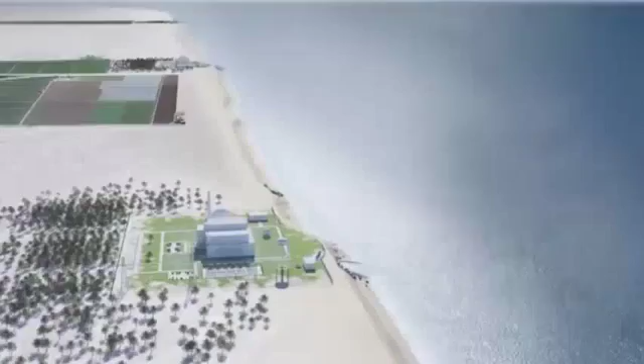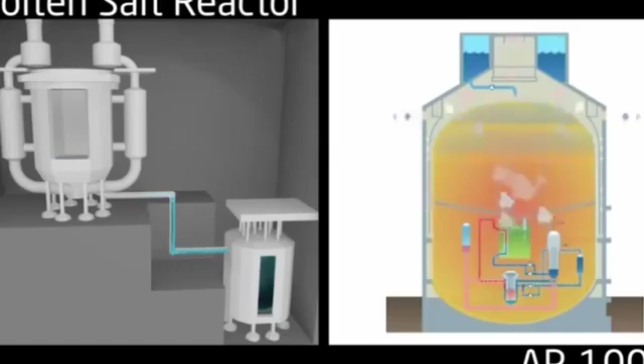While molten salt reactors allow previously unattainable levels of passive safety, this does not mean that pressurized water reactors present any greater danger than coal, solar, wind, or natural gas. Despite Three Mile Island, Chernobyl, and Fukushima, existing nuclear power is already the safest form of energy available to mankind. This is because every source of energy has risk associated with it. Molten salt reactors and other modern reactor designs such as the AP1000 minimize the impact of any error by improving passive safety mechanisms. Any incident at a newly constructed reactor is much less likely to disperse radioactive isotopes. But the key to reducing errors in the first place is having a well-regulated industry.

Hey, Barney. Yo. Open 14 and 15. You can't do that, Jack. Open them, Barney. Jack, you can't do it. The book says you can't do it. Screw the book. We're almost up to the steam lines.

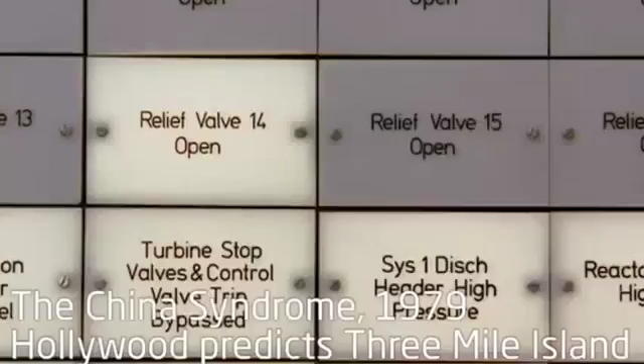It just might be a feed water leak. Which valve? Can't really tell. Shut the isolation valves. You're gonna need that feed water later. You wanna go down there and do it by hand? Do it. Jesus Christ. Water, Barney, give me some water!

God damn it! We'll probably never know the full extent of how badly Soviet nuclear power was managed.

I sat before the world in Vienna and blamed those young men at the controls. I made no mention of the role I'd played in their ignorance. I did not speak out.

Valery Legasov's suicide caused shockwaves throughout the Soviet nuclear industry. Design flaws in the graphite tips of Chernobyl-type RBMK reactors were finally admitted to and changes hurriedly made. But we do know that Japan's nuclear industry has seen a steady stream of fatalities. This does not happen in France. This does not happen in Germany.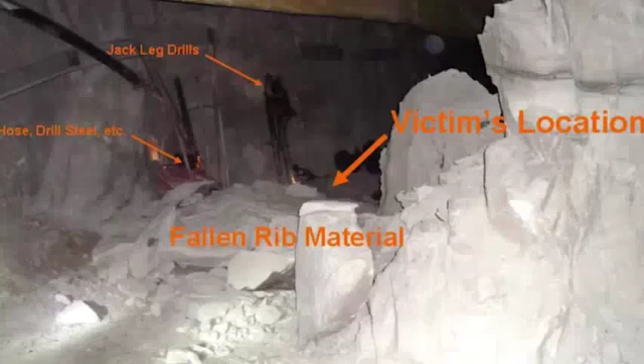Over a 10-year period, from 2003 to 2012, United States nuclear power was responsible for a single fatality. A uranium miner died when a support beam collapsed. Because every single source of energy has caused at least one fatality during this period, and we know how much electricity was generated by each energy source, we can express how safe each form of energy is as a quantity of watts per human life.

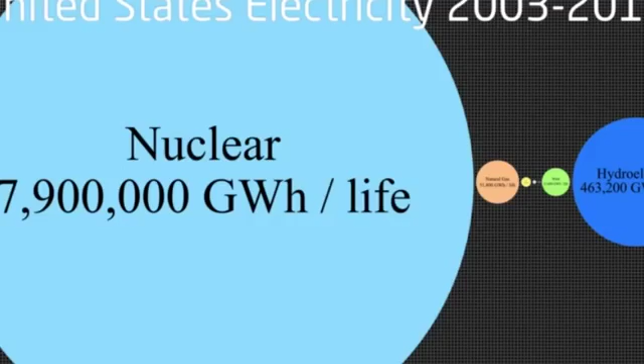For nuclear power, because there was only a single fatality, we divide by 1. Almost 8 million gigawatt hours of electricity per human fatality. The next safest form of electricity is hydroelectric power. Hydro produced about half as much electricity as nuclear, for which 6 people died during that same period.

Next is natural gas. We've all seen natural gas explosions on the news. Somewhere between 26 and 27 people were killed during that same 10-year period. It is a fractional number because the natural gas was dual use. Only a portion of it was for generating electricity.

Now that we're burning fuel, we have air pollution to consider as well. 144 fatalities can be reasonably associated with the pollution caused by burning natural gas over that same 10-year period. Even with the cleanest burning fuel, air pollution kills more people than explosions. Natural gas gives us about 52,000 gigawatt hours per human life.

The safest renewable is wind, about 21,500 gigawatt hours per life. Wind fatalities are due to maintenance. Just like nuclear power, this could easily go up or down depending on how the industry is regulated in the future. But there are a lot of turbines, all requiring regular maintenance, each one producing a moderate amount of electricity.

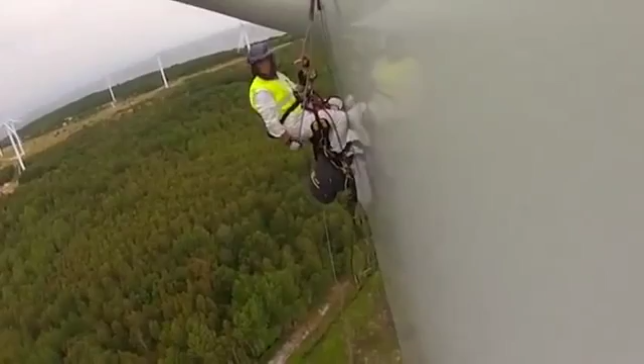To improve the watts-to-life ratio and try to make it as safe as nuclear power, it is reasonable to expect the cost of wind turbine maintenance to go up, driving up the cost of wind power. 27 people died maintaining wind turbines over that 10-year period. Natural gas comes out ahead of wind because it produced far more electricity.

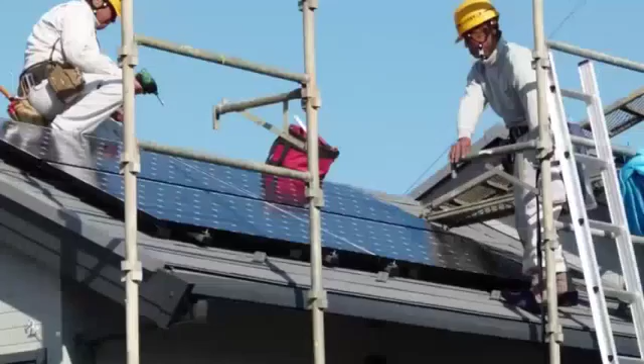Solar is 2,500 gigawatt hours per human life. There are a whole lot of rooftop solar panels, and each one only produces a tiny fraction of the energy that a wind turbine does. Of all renewable energies, photovoltaic solar power is the least competitive in terms of price, but it also offers the biggest opportunity for improvement if panels can be made more efficient. Such an improvement in panel efficiency would also improve solar's safety standing, since more watts could be generated for the same amount of maintenance.

In the United States, from 2003 to 2012, the average number of watts generated per fatality is 300 gigawatt hours per human life. How is our average so much lower than any number we've looked at so far? Because of coal. Let's not forget electricity produced by burning coal. Coal mining killed 298 Americans over 10 years. Coal mining fatalities dwarf all other forms of accidental death in the United States.

But the big numbers are in air pollution. In 1 decade, burning coal has killed over 130,000 Americans, largely due to the release of tiny solid particles that we inhale, causing respiratory illness. Burning coal also exposes us to mercury poisoning. This is how America's consumption of electricity kills people, by coal. Every other source of electricity is safer per watt.

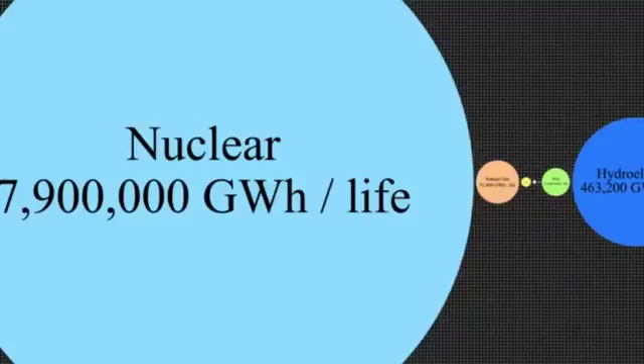On the other end of the spectrum, no other source of power has the potential to meet all of our electricity demand with such a small impact on human lives, disrupted ecosystems, and future costs projected from greenhouse gases being pumped into our atmosphere. Nuclear hardware is shielded from the degrading effects of sun, wind, and rain.

All safety systems are focused on a small area and a handful of highly trained individuals. Nuclear has the advantage that the amount of energy per atom is about a million times better than coal or natural gas. So you start with this huge advantage, and yet given the complexity of the plants and the things you have to do, you more than wipe out your million-to-one advantage.

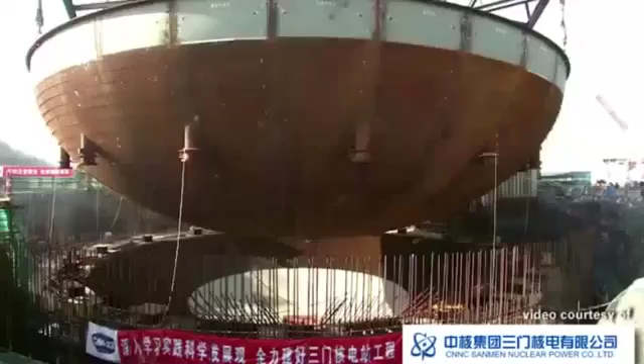And today's nuclear plants are fairly expensive, at least the way they're built outside of China. They're pushing the state of the art, and they're standardizing designs and things like that. So nuclear is one of the directions that we should innovate in. Nuclear innovation stopped in the 1970s. We basically have this sub design that was put into Shippingport for the first power generator, and we basically built 400 of those that are all kind of custom, but not in any interesting way.

The reactors in the United States used to have like 40, 50% uptimes. I mean, they were horrible. They standardized everything they could, pumps, valves, motors. That's how crazily one-off these plants were. They would get custom nuts and bolts for the pressure vessels. Well, part of that is due to Three Mile Island, because after Three Mile Island, they realized that training was not that good and was not uniform across the companies. It forced all the companies and utilities to get together to share their training and procedures. It made a huge difference. Yeah, Three Mile Island, what an indictment of how poorly managed the industry was back then.

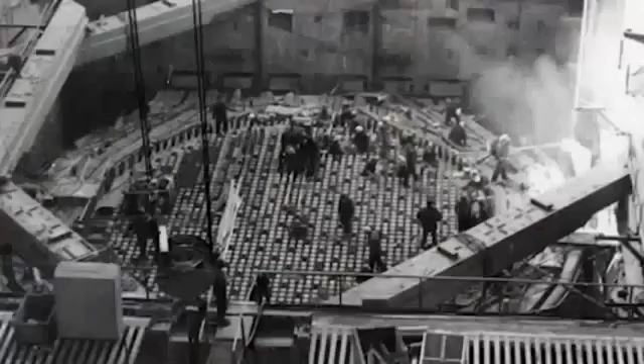Choosing nuclear power does not guarantee safety. It is possible to make an unsafe reactor, to staff it with poorly trained individuals, and it is possible to respond to the release of radioactive isotopes by doing nothing at all to protect the public.

The other five reactors in the Fukushima prefecture were built just a few years later, and all the reactors at Fukushima Daini, none of them had significant damage. We figured out how to prevent that problem sometime around 1971, 72. The one thing that the Japanese didn't do was go back and fix the early systems, because they thought, we've operated the plants for 40 years and it's not been a problem before.

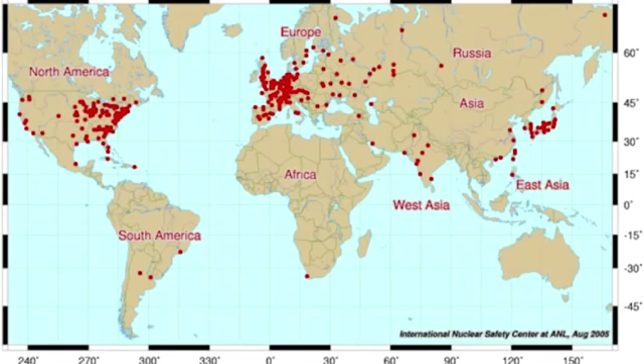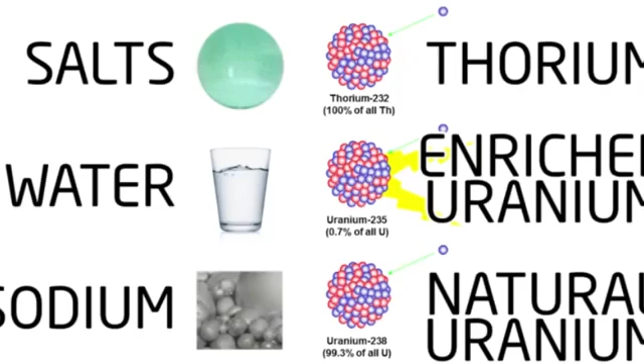We have three standout examples of what not to do, and decades of safe operational experience from hundreds of nuclear reactors around the globe to learn from as well. What choices can we make today so that nuclear power can be even safer? Very few people understand all the options that are available in nuclear energy. It's a complicated subject. It's a subject that is actually quite new. The first chain reaction experiment was December of 1942. My mother was a teenager in 1942. She's still alive and kicking.

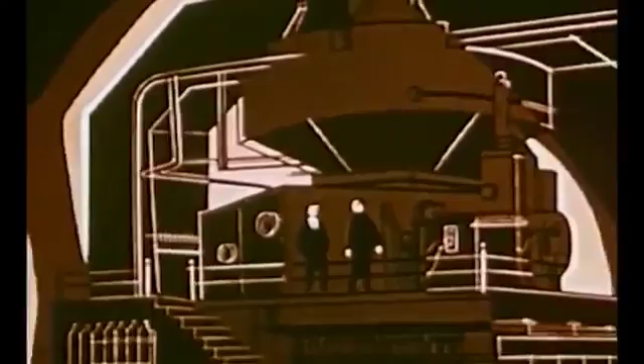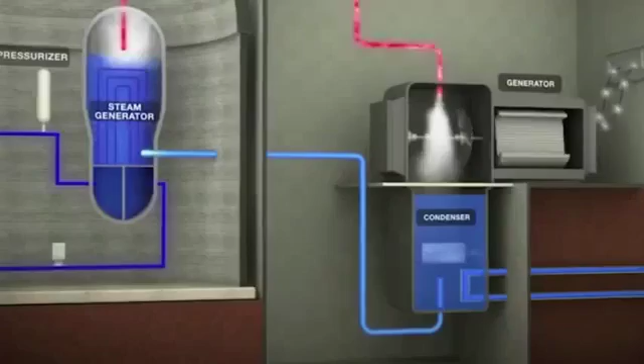This is the only part of the energy business that has anything close to a Moore's Law capability for improvement. We're still at the very early stages of figuring out how best to put that energy inside the atomic nucleus to use. At the time when society had its most optimistic view of science, it had the view that if that was the form it took, then it must be the right form. But we still have this view that society can't shape technology, that the form the technology takes is the form we must accept. What science and technology gives you is a range of possibilities, and those possibilities can take you in any number of directions.

I'm Bert Wolfe. I headed General Electric's peaceful nuclear power program. General Electric and Westinghouse took the simplest form of nuclear reactor, originally designed for submarines, and redesigned it on a gigantic scale, offered to power companies at knockdown prices. We would sell one at a time, and each time we sold one, we'd have a celebration. I can recall when we'd have meetings and someone would come in and say, we sold a plant to somebody, and we'd all stand up and shake hands and go out for lunch and have wine and toast each other. It was a great celebration. So we began selling these by the tens, so it became a real business.

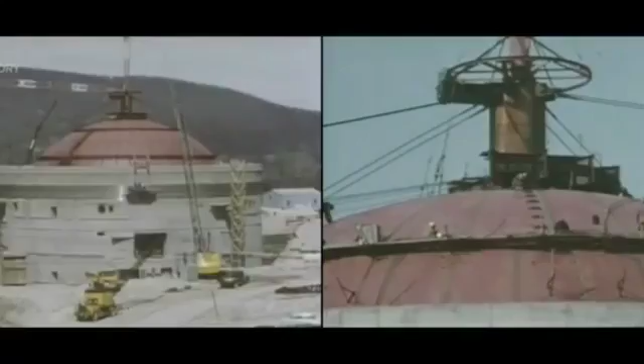The history of nuclear power is a history of political and economic and social decisions being made about a technology. And the key decisions weren't made by the technologists. They were made in the business realm.